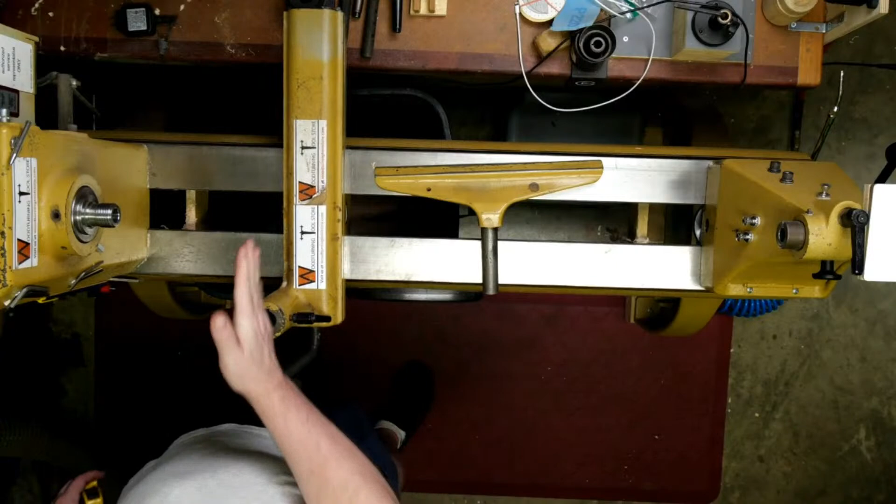So if we measure that, that is about 8 inches, so you lose a couple inches under the banjo. But that's why they put the banjo tool post offset up this side of the banjo. So I like that design where the post is offset from the banjo. And if we look overhead, yeah, that's going to show it - you can see that if I have the tool post here, I'm missing the banjo. So that is a nice design on this kind of banjo.

So what I don't like is just the single pinch point on the banjo. It's not a clamp, so to speak. And I guess I could zoom in a little bit on that.

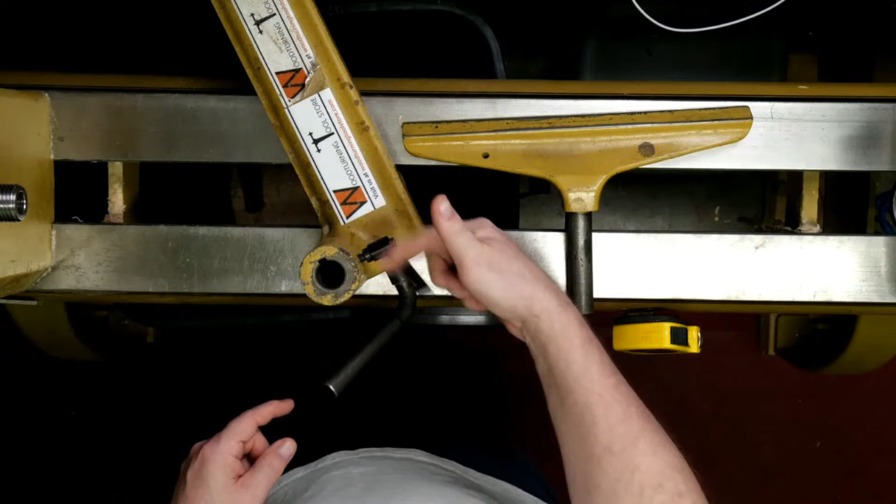Other things to note about the banjo that I do like is that I can move this from this hole to this hole to a hole over here, so I can move that any way I want. The other thing is that, and most banjos operate this way, you can lock it this way or this way. It's a simple cam shaft underneath there, so either way will work.

The other unique thing about this banjo is it's got slots in here, T-slots. Yeah, that kind of shows a little bit right there. So that's a T-slot running down the whole side. It's also on the other side, but it stops here because this part's in the way. So I've got T-slots along this whole length here. And what is that for?

Well, I bought an accessory that everybody asks me about every time they see it in a demo. I'm going to put my tool rest out of the way, and I'll bring it out over here.

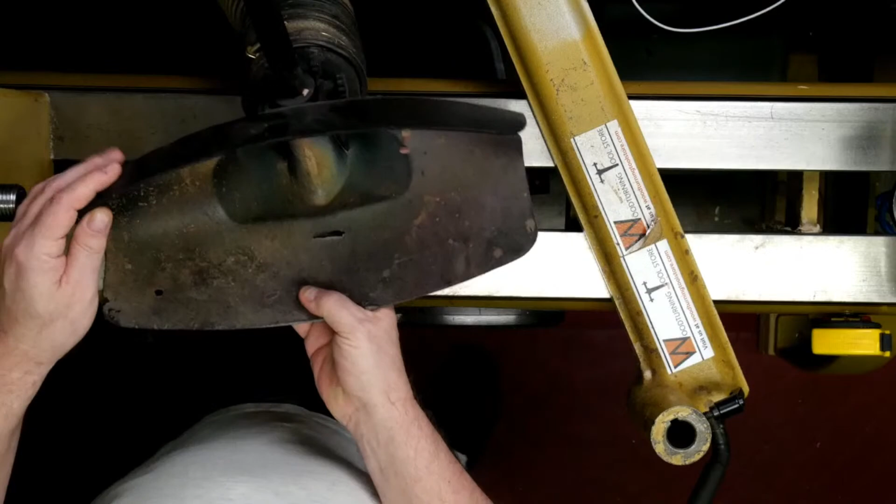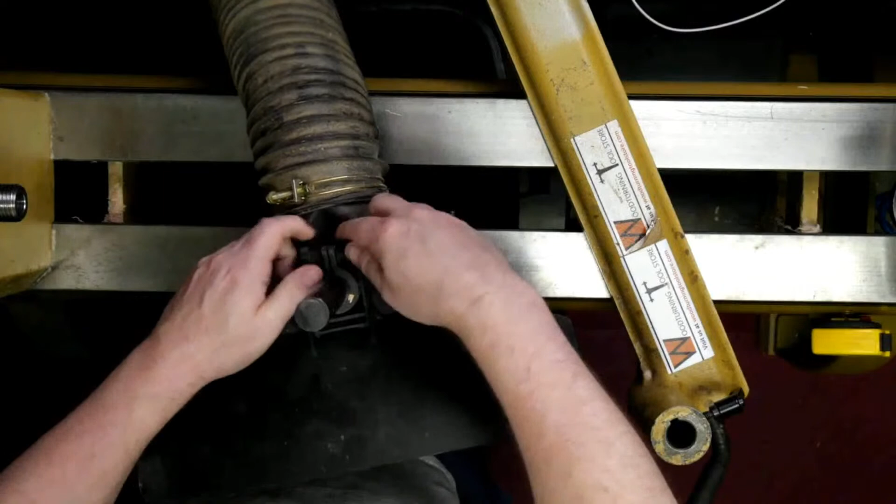It's this dust hood. So this dust hood is a flap up here that kind of goes out. There's the hole, so it goes in around this center post and into a 4-inch dust hose back here. This center post is what goes right through the middle, so I can loosen these two knobs - actually not that one, these two back here - and raise this up to the top of the post, down to the bottom. That might be better shown over here, up to the top and bottom.

Move that around, kind of see. So that allows you to get the height on this where it sits, and these other two knobs make this flop or not, and so I can tighten that up and have that stand. If I get that tight, up out of the way, or down, or stay anywhere I want.

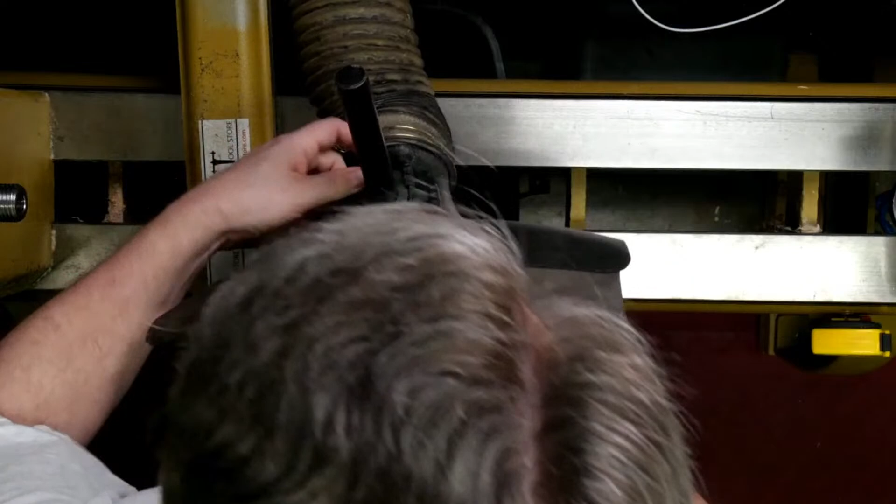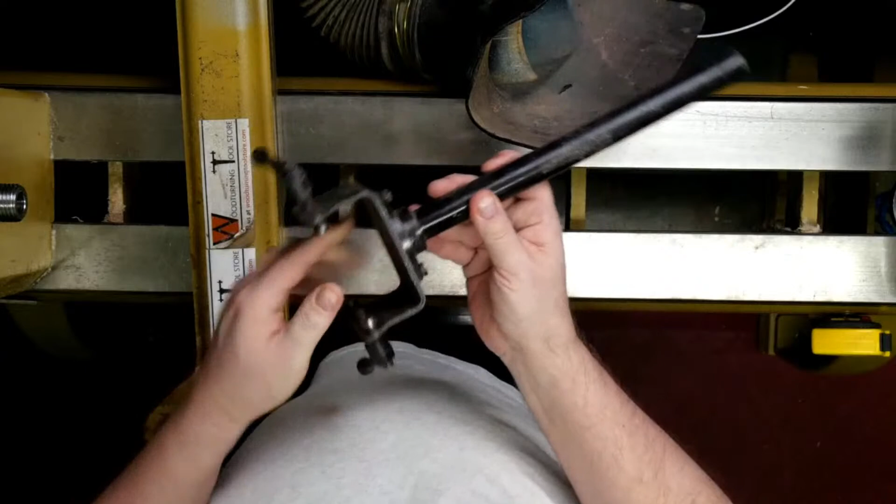So on the base of this guy, and I'll switch back over here, is a flat bracket. It's basically a flange mount, and maybe I'll take this right off. So we've got a flanged bracket, this pipe onto an L bracket, and we've got some T-slots here and some more spring clamp twist clamps here.

So what does that do? That slides right onto that T-track there, and so I can position this post anywhere I want along there, and I can tighten it up, loosen it off. So that is what that is for.

So from a side view, you've got this post you can move around in your banjo. And so when I stick this back on, tighten that back up. When I am turning, I've got my turning object and my dust collection right there, and it's going to stick with me wherever I put the banjo.

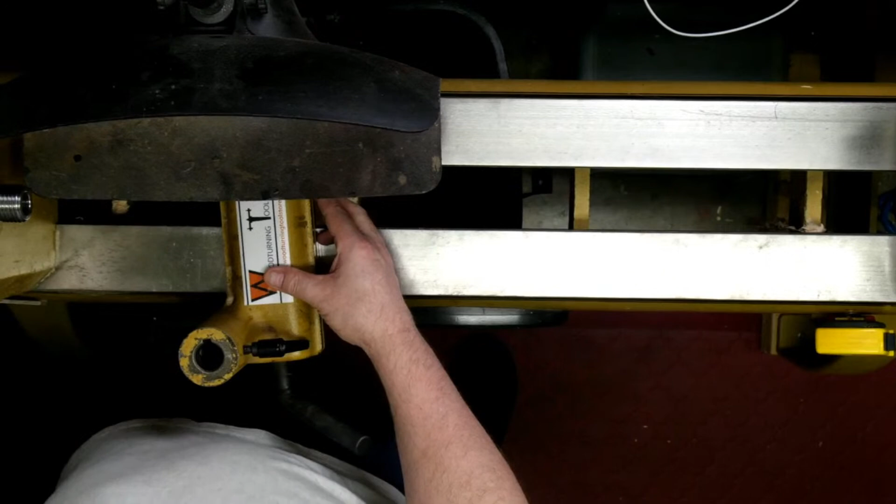So there are some times when it gets in the way, especially right here at the headstock. Move down this way a little bit - it's going to get bumped up against there. But you can easily turn this, move this, and twist your banjo and twist this head, whichever way you want to go. So it is one of the most asked about accessories on this lathe that I've encountered.

I got that thing when I bought the lathe. I bought this lathe in 2007, so that's 16 years ago. I don't know, you can't find these anymore. They hadn't been sold - I think a couple of years after that they stopped selling them. Great accessory, but I think the machining in the banjo was just them trying to cut costs or something.

But yeah, something like that would work if you have the wherewithal. Even a heavy magnet on this guy with a dust hood, or just a hose, would be fine as well. So let's see, yeah, 16 years ago - all the other accessories that I've got with this lathe.

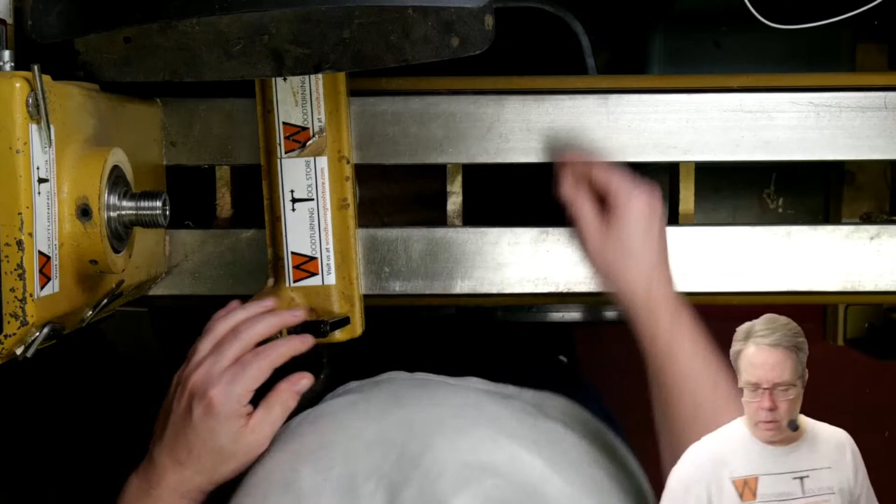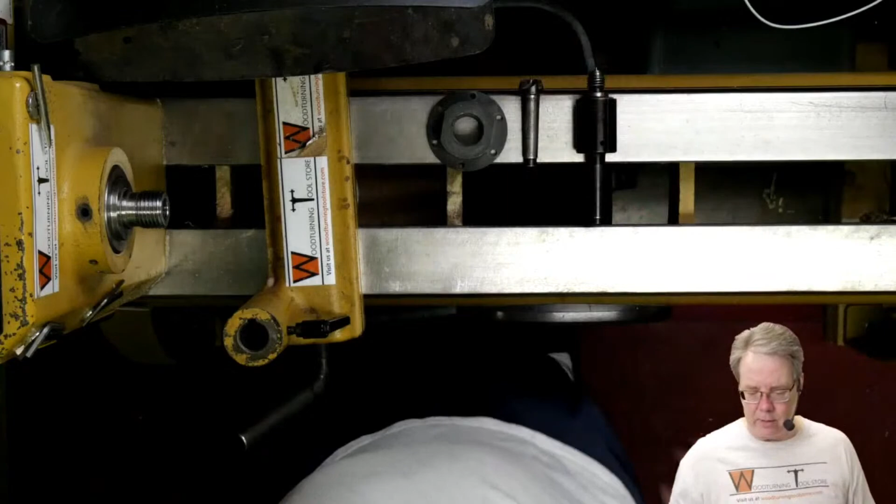Let's see, there is a faceplate, live center, dead center or drive center, and then the replicating pin and drive. And those things go in these brackets. These brackets go on - I don't know what's the best way for me to show.

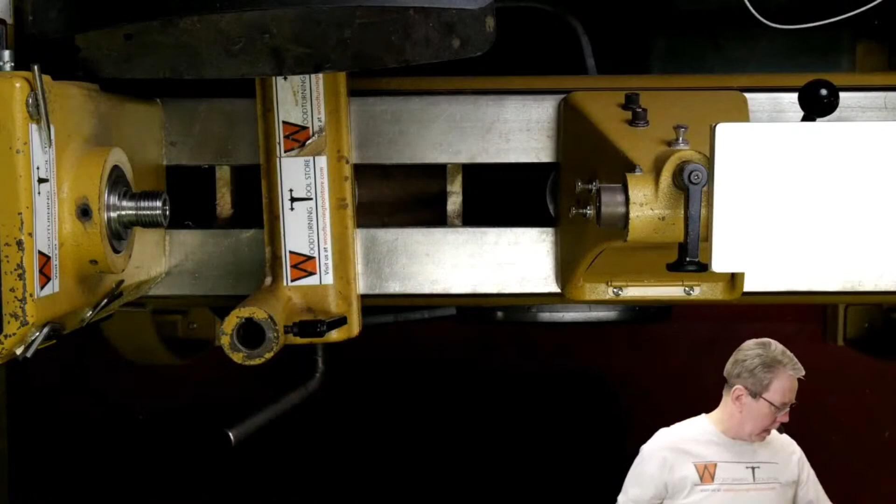So I've never used this guy, but you can see these two bolts here, and there's two more over here. I've got another one of these that has the right bolt pattern for this side. This one's for this side near the headstock, and then another one here. Basically, these two guys would go into these holes - I'll just show this one here.

This one is the headstock one. It's got these indents in it, and this has a plunger pin with a pin in there. So if I pull that pin, drop that in, it'll lock into that and won't turn.

So that's the drive side. That goes on this side, back of the headstock here, and then the other side will go on here. It's for replicating spindles. So you hold your spindle pattern up there, you turn what you're turning, and you can replicate it. Use your drop notches if you want to use those and that kind of stuff.

So I never used this, so I took these brackets off pretty quickly, but I kept them around. So anybody out there use those? Let me know, because that's what they're for.

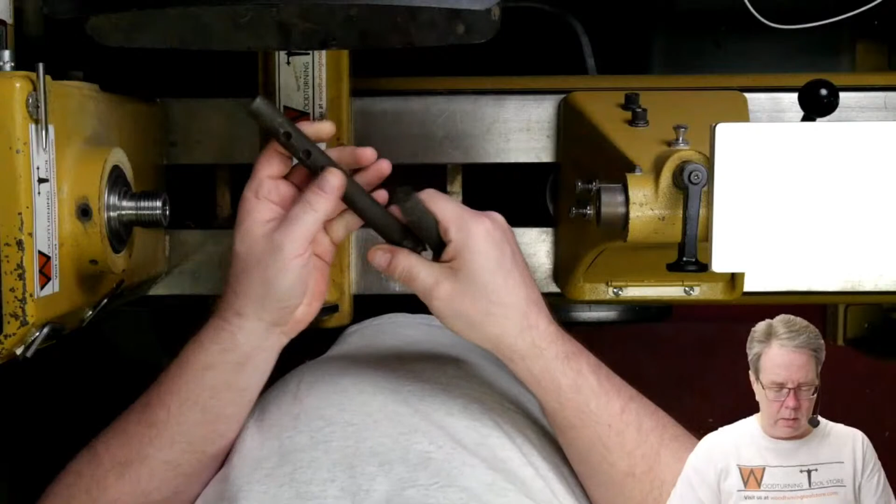These are not, by the way, Morse tapered. These are just straight shafted. These ones have a thing in it, and this is a flat for it, the other one has a clamp on it, so you can clamp it down.

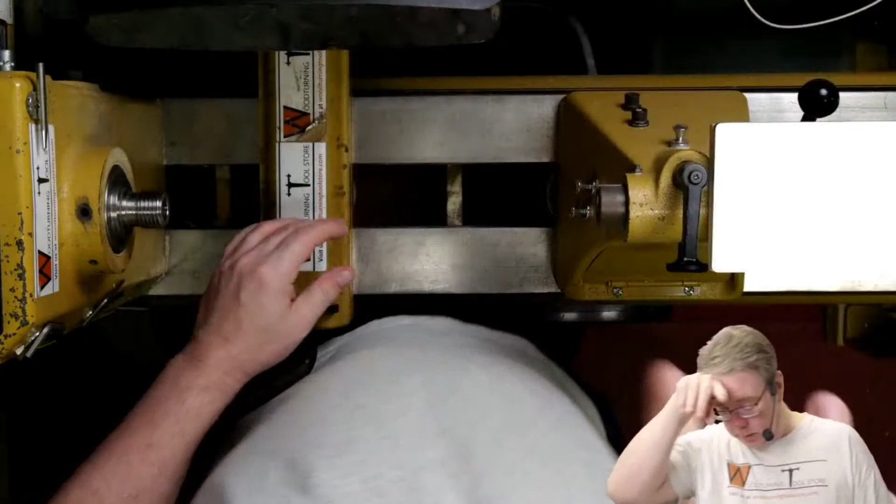So that's the accessories: the drive center, live center, faceplate, the brackets, and the spindle pattern holders. Oh, and there's a big cage that you can put on this. It's in the shed. I haven't even unwrapped it from when I bought it 16 years ago.

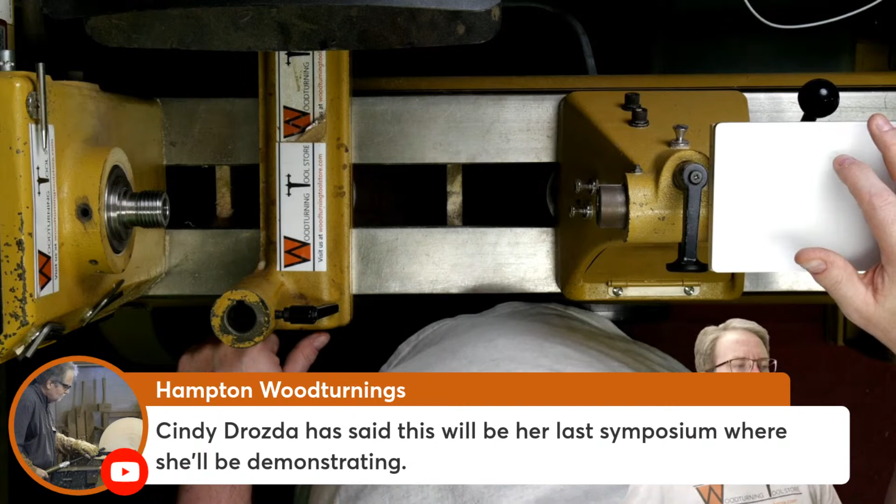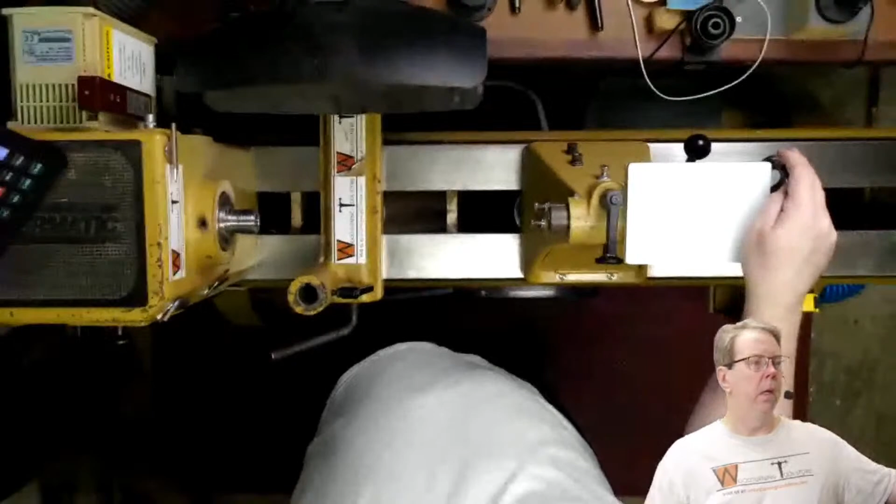Scott says Cindy Drozda has said this will be her last symposium where she'll be demonstrating. Yeah, she did say that. I think in passing, I don't know whether that's true or not, but yeah, it's a lot of work being a demonstrator. Just get my belly out of the shot. Sort of taking all your tools and going down, doing that work, and plus she has a booth, so it's a tough thing for her to kind of demonstrate and do booth work at the same time.

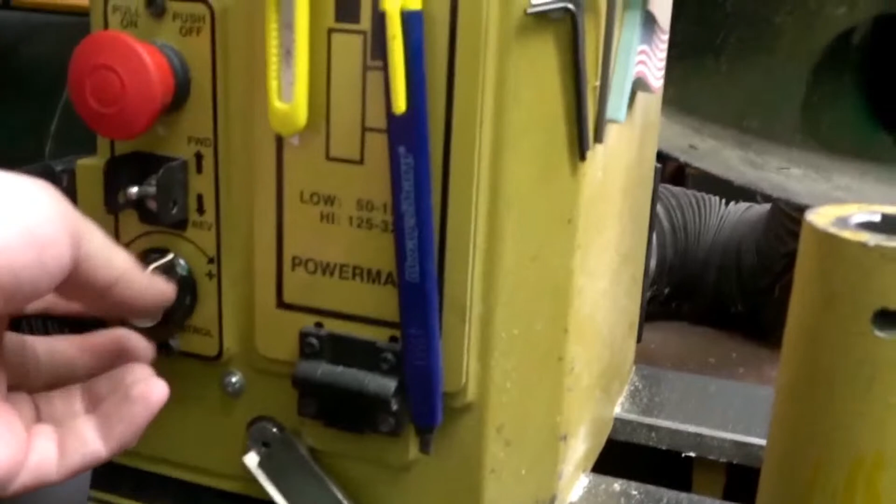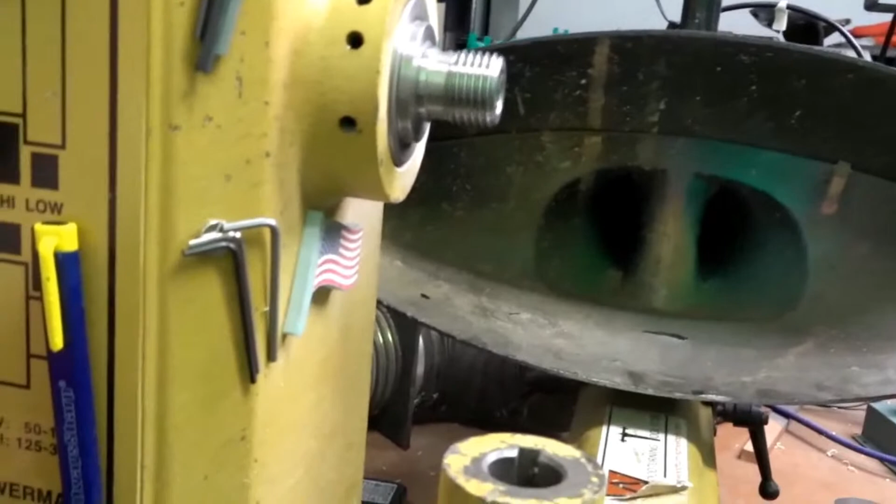So there's the variable speed switch here and push-pull button here. And that gets the spindle going, and that gets up to 3,200 RPM.

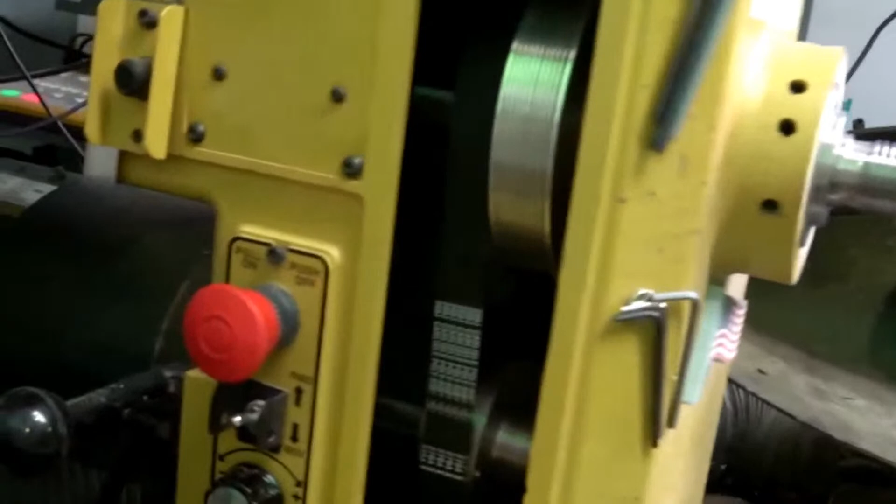I've got all my little magnets on my pencil, my utility knife. This is the pulley drawer. So if we look at the pulley, it says low 50 to 1200 on this side. High is on this side, and that's 125 to 3200. So I'm on the high side right now. So this is how you change it.

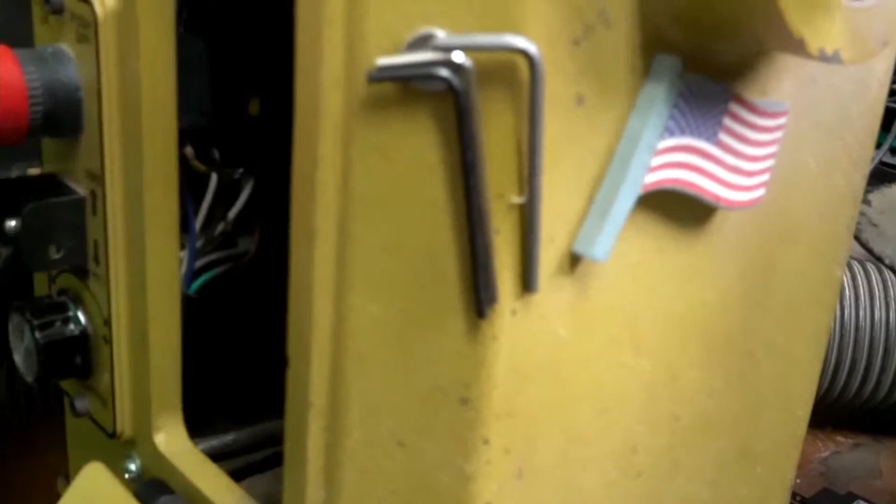And John's had to go in and change this switch off in there, and I wonder. I do have a light. Sorry, folks, here's the rest of the shop as I swing my hand around. There's the green screen. Back to the lathe.

Trying to operate the camera at the same time, not very easy. All right, so got myself a little light here. So there's the light switch, or the power switch back in there. So John had to replace that guy a couple times. I have not, and so I don't know.

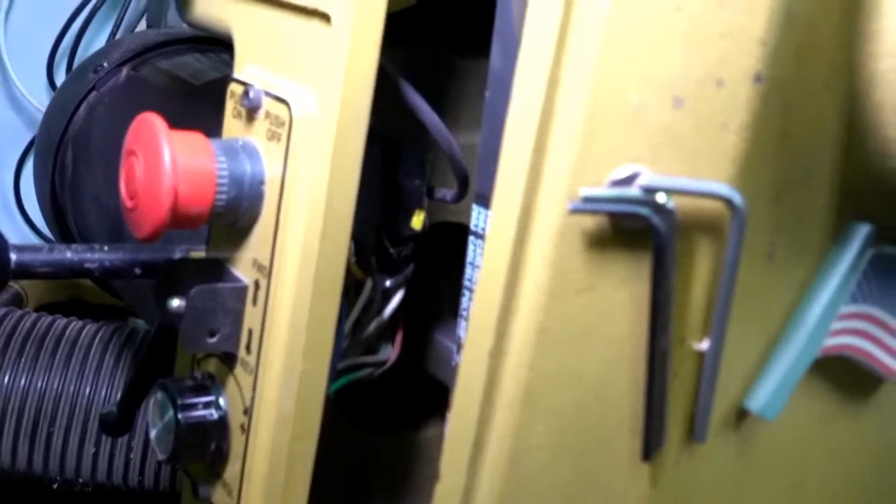I pulled it off once, pulled all the guts out, because what I did have is up in there on that shaft. I can get up in there. There's the main shaft. Back behind this RPM meter is a place where this lock knob is. So if I turn the spindle there, it's locked in. So that's the spindle lock. That locks into a block that's running in the shaft that has a slot in it.

That came loose, so my spindle lock wasn't locking. So I had to pull all this out, pull that out, access that little pulley block, and tighten up the set screw on it to get it to lock again.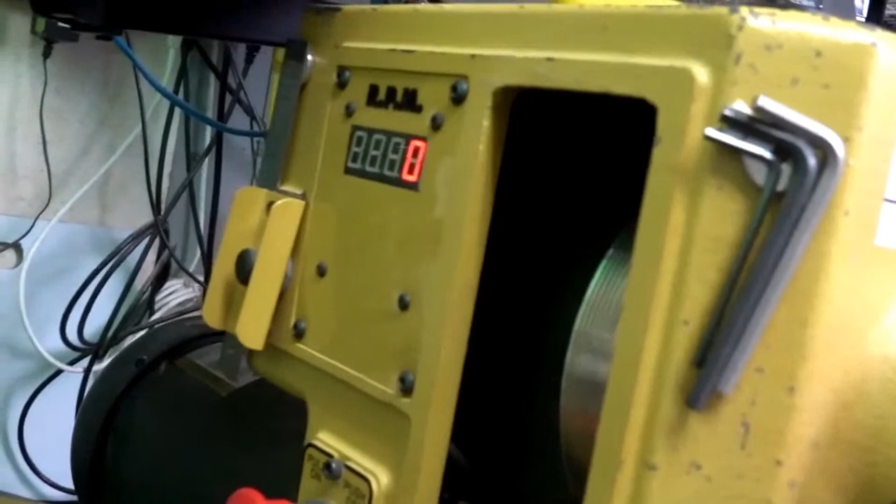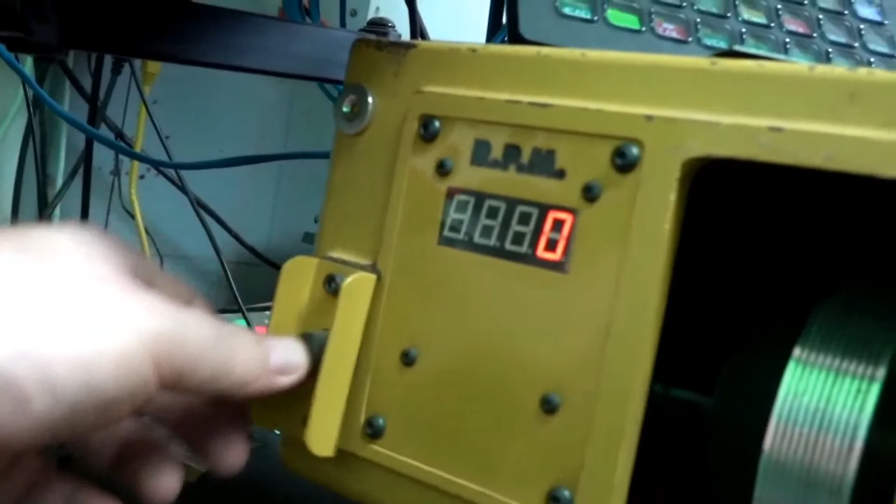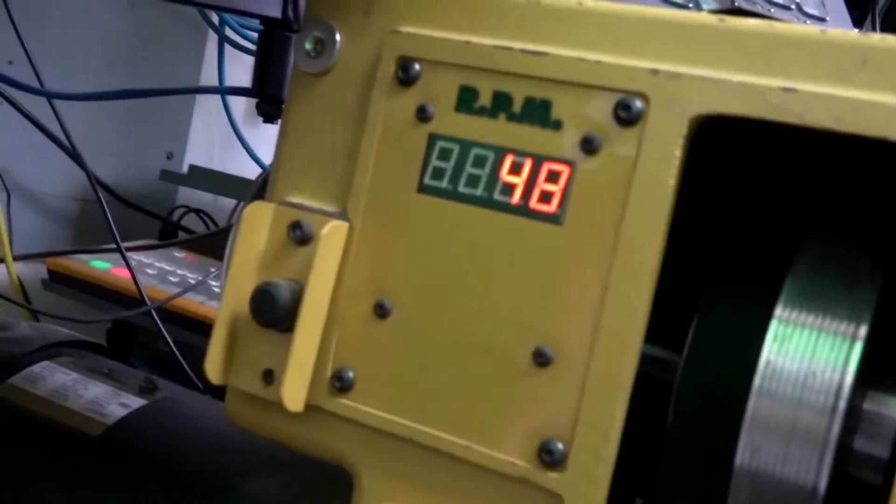One of the cheats I've done, and this is just a ruler hanging on a magnet, is in order to keep that spindle lock down, I took out the bottom screw. I'm not quite sure where it is now, so whoever buys it is going to have one loose screw. I loosened this top one, and when you push it down, you just swing that bracket over, and that locks it for you. Then you just push that back, and it's unlocked. So that was a nice cheat somebody told me about years ago. So there's the lock, swing that over, and unlocked.

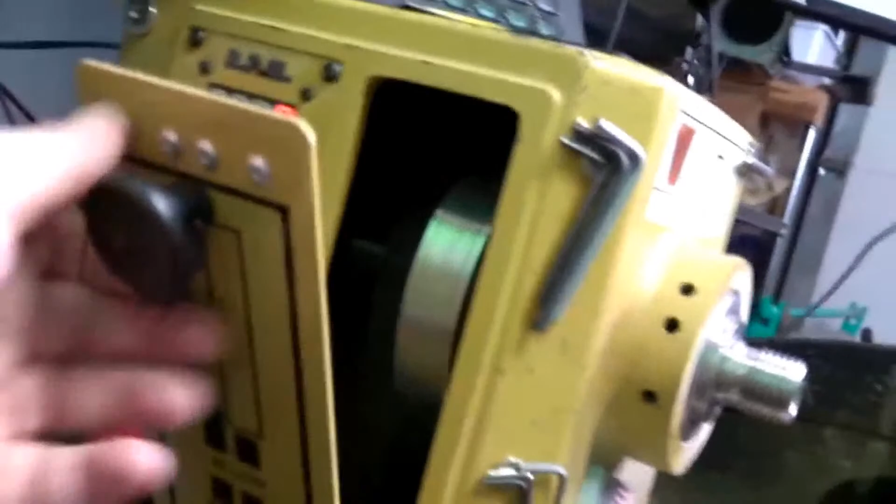If I just barely turn it on, I get 162. I don't know how I get 125. There we go, 129. That's about as low as I can go.

Yeah, that's as low as it goes on the high pulley. The low pulley will go down to 50. I'm on the high speed 99% of the time, so I don't change the pulley very often.

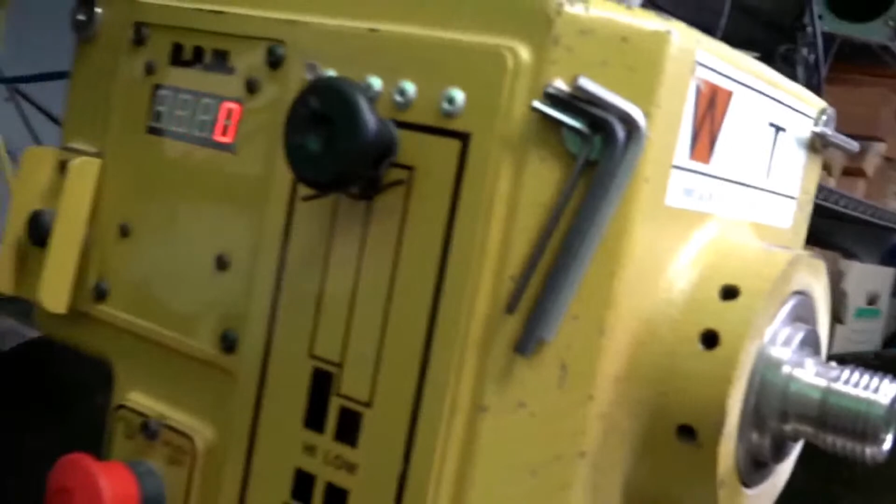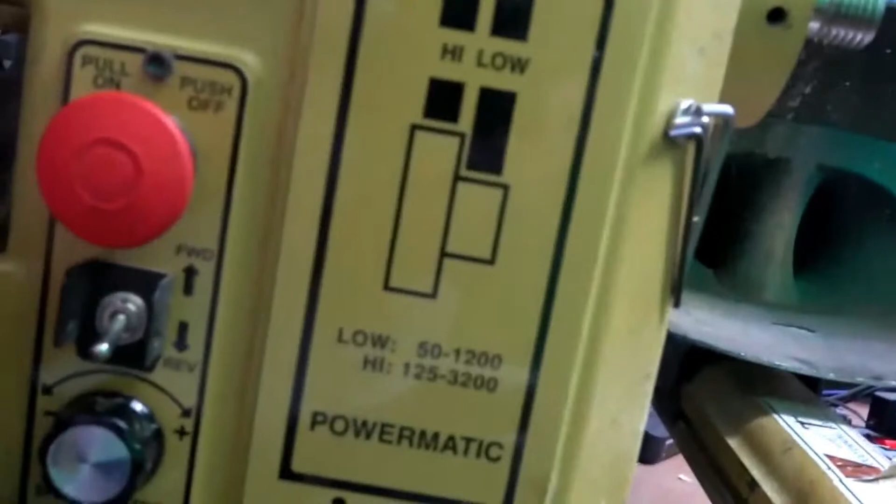Here's the forward and reverse switch. The motor is sticking out the back, and we've got a clamp lock here. Loosen that and it will raise your motor up and down, and that's how you tighten or loosen the pulleys.

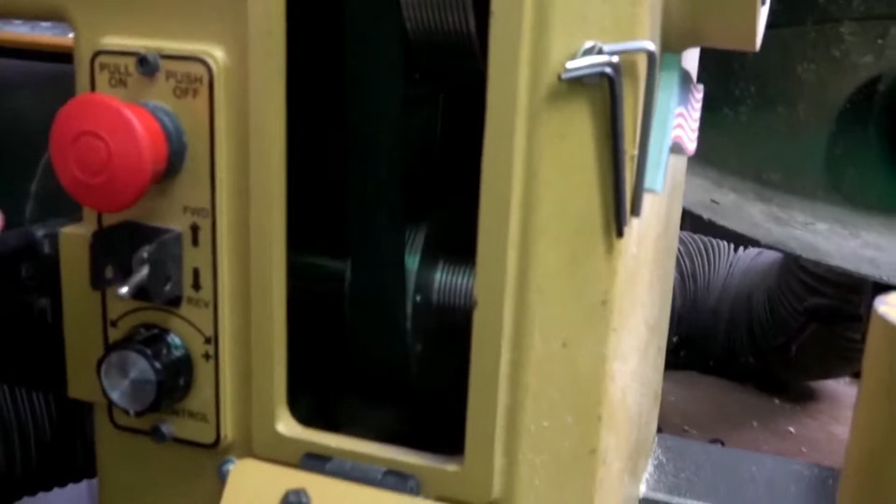You can see the slack there, it's hard to see since it's not very light in there. Let me try a single-handed maneuver here. So if I lift up this bracket, that loosens the pulley, and then you lock it off.

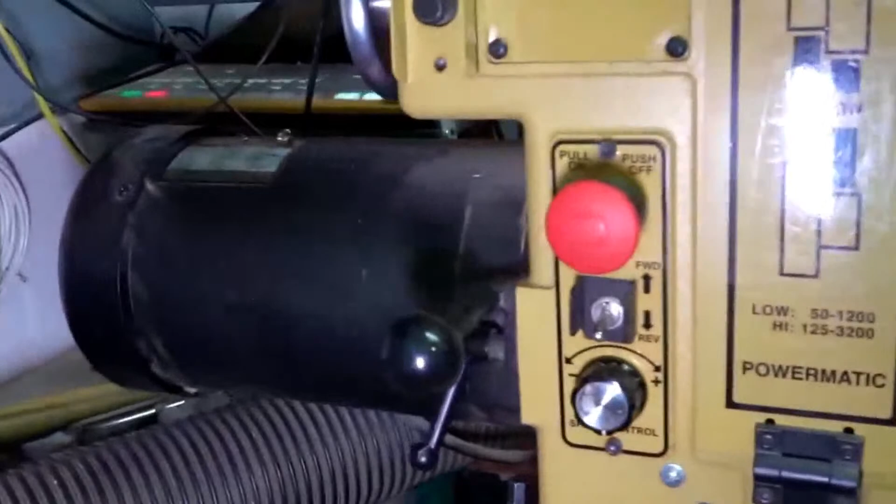The hand wheel is back here, underneath my keyboard tray, so it's a little hard to get at for me right now. That's the motor, obviously. Down here is the accessory tray.

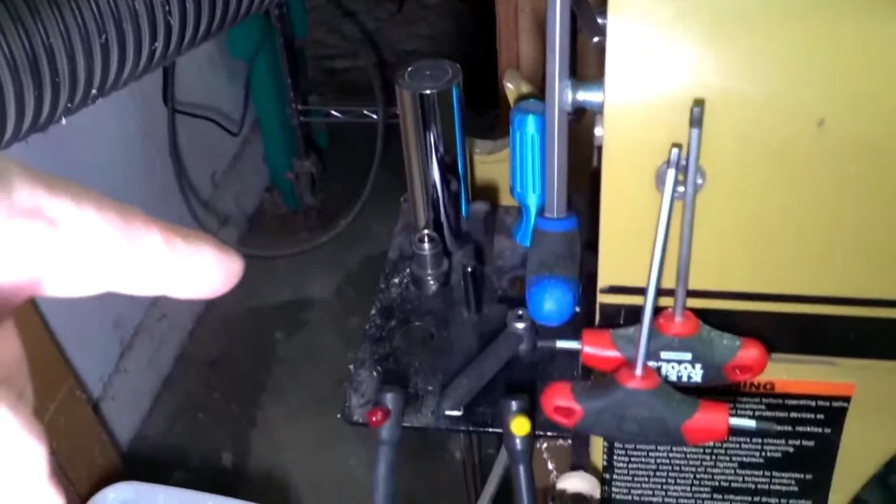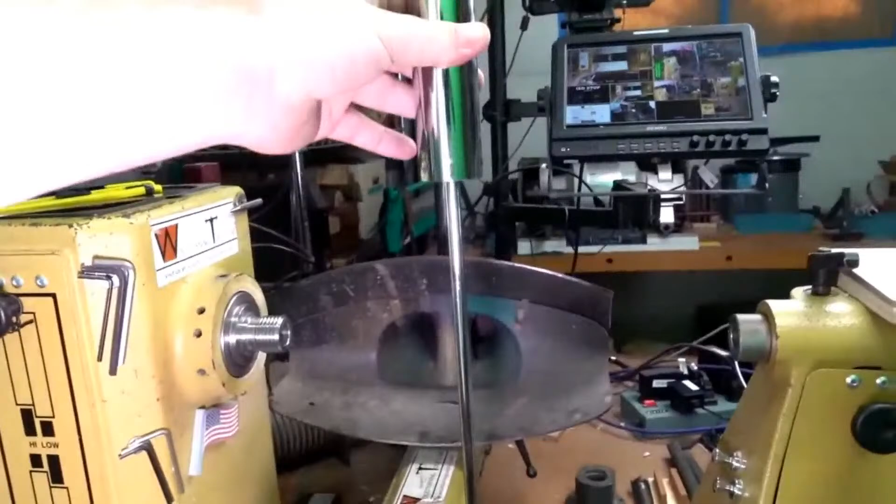It's bolted onto the side, so I've got magnets here holding Allen keys. The knockout bar is another accessory - in fact, I might keep this one. I wonder if I can zoom out a little bit. This knockout bar has a plunger action that gives you some momentum when knocking things out. And then you've got the big Powermatic wrench back there, the yellow wrench.

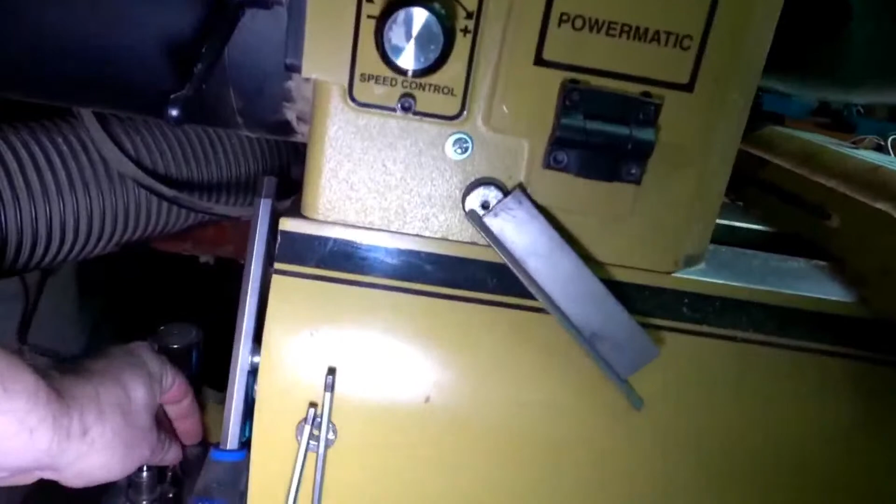The other accessories that come with it are these little guys - this is your indexing lock. Don't buy a Powermatic for indexing, it's horrible. You've got 1, 2, 3, 4 holes.

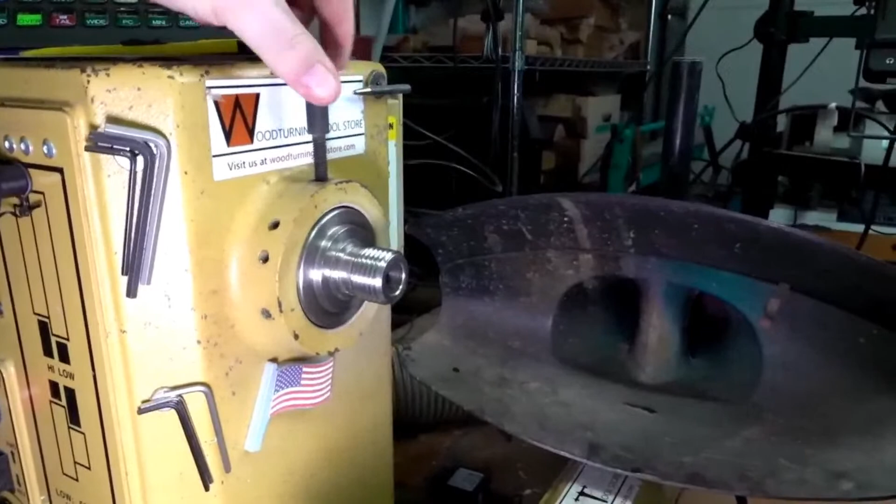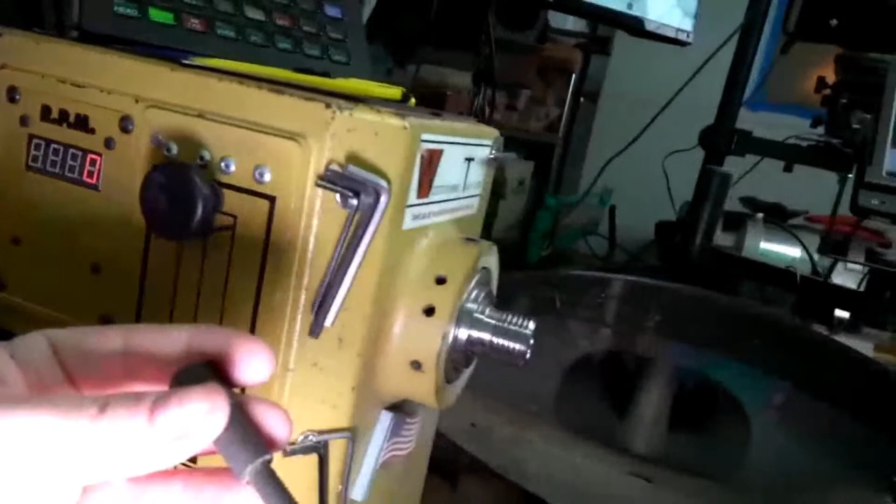On a B model, the way they want you to index is screw that into there until you get down to the depth, lock it off, and then it locks off. I'm not going to go all the way - this one I think will give you 12 holes, and you can do 6 as well. I can't remember, but in the manual you have to check which hole, A, B, C, or D, for 14, 16, 32, 48, 60, etc. It's just ridiculous, but I still keep it.

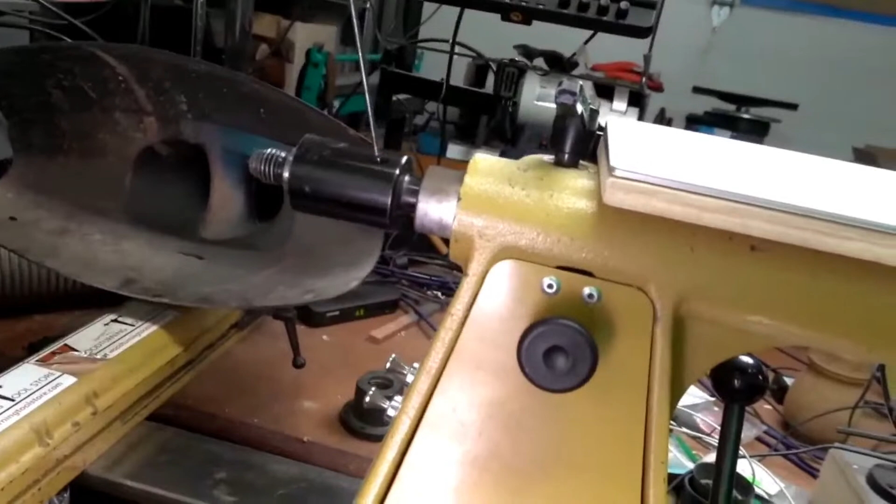3/8 by 16 is the thread on that. The other one is a little locking wire, and that's for the steady rest - turn that away. It's got a little hollow in there, so when you get it you can put it all the way through, and that locks this so you can add on accessories, which I keep in here. Here's the cone point that comes with it, so now you can screw that on. So that's what that's for, to lock your live center.

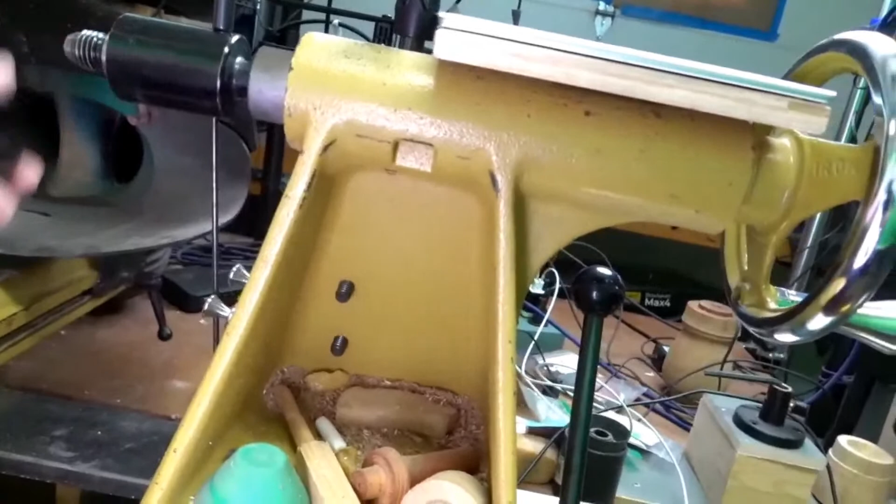This door in the tailstock is kind of nice - I keep centers and stuff like that for the tool rest, plus chalk and wax and stuff. So that's that accessory, and it's got a little hole right down there.

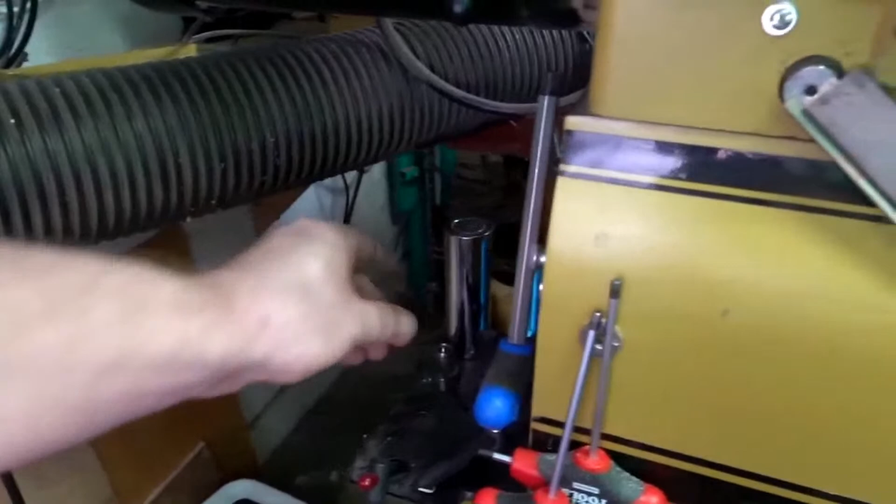What else? The feet are there, obviously - I've got them on two 2x4s, raised up off the floor. My spindle height right here is about 48 inches. My new lathe, which is going to be an American Beauty, can get up to 49 inches, so I'll raise it up all the way to 49 and have this just slightly higher - that's the way I like it. I'm 6'2", so it's hard when you're bending over so much.

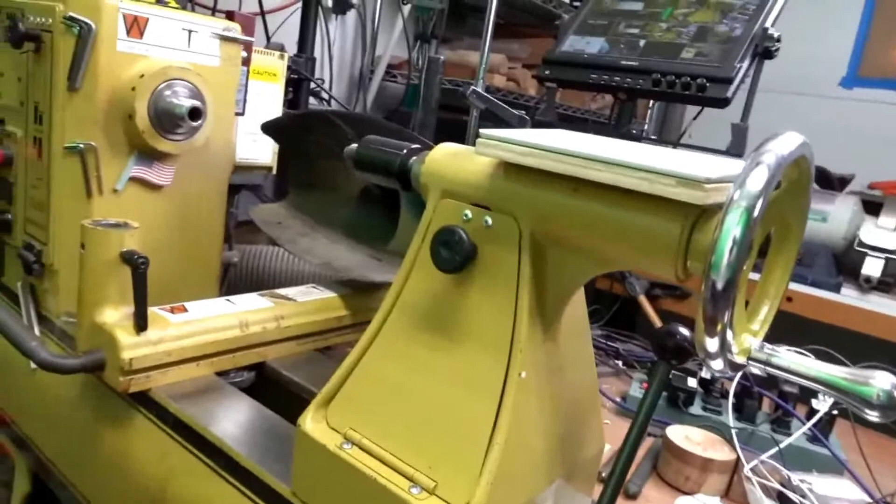All right. And zoom in just a little bit on that one. Yeah, it's pretty good. All right. I didn't do this earlier - I should have done that.

So we'll catch up on questions. John, I guess I don't know the answer to your question - I have not changed this switch out at all, not sure what's going on. Charlie said, 'Now that's a good idea,' and I'm not sure what that is, but thank you. I'm going to add a remote switch because my push-pull switch keeps wearing out - I use it a lot, and Powermatic's still covering it under warranty. Okay, good, I'm glad they're still covering it.

When the lathe is slowed down, does it hurt the electronics to reverse the speed before it stops? No. In my experience - 16 years with this lathe - I can pull it on, have it running, throw it into reverse, and just come back the other way, throw it into forward.

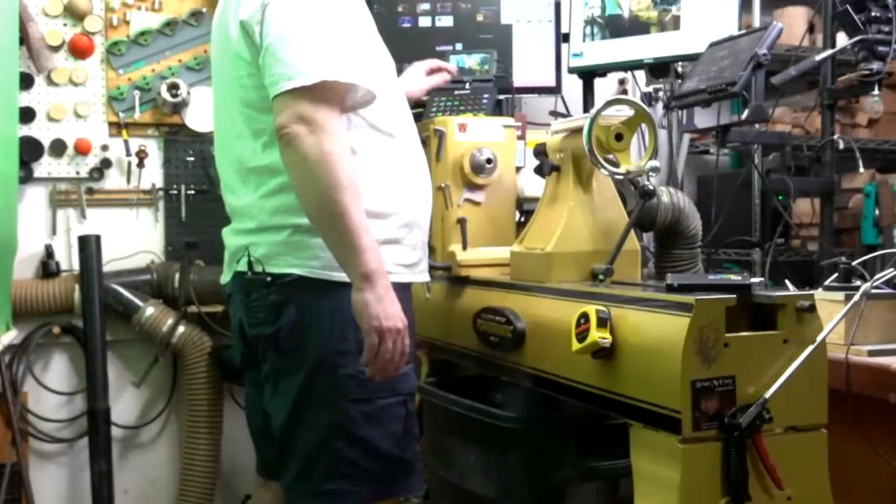So let me go back to this shot, and I'm going to just take some quick measurements. The lathe bed is 50.25 inches.

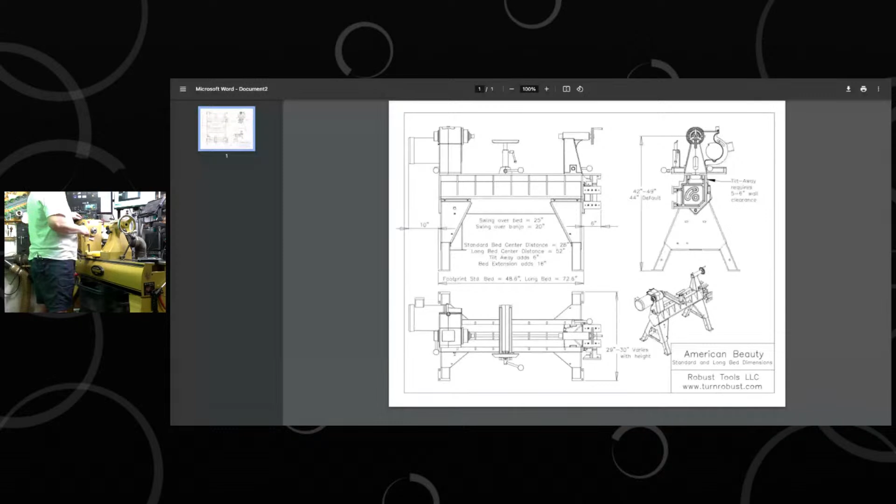So this is the spec sheet of the American Beauty, and I think I'm going to have to pull that spec sheet over to another screen so I can see it at the same time. So its footprint of the standard bed is 48.6, about the same as this lathe here.

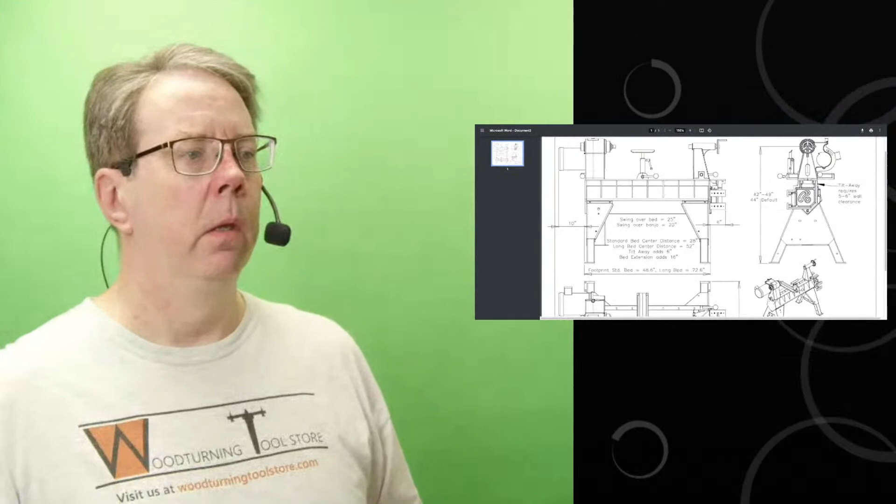So let's do this one here, and let me pump this up a little bit so you guys can see that. And so let's see, now let's go to that one. Yeah, so this bed length is 50, so it's about a little bit shorter.

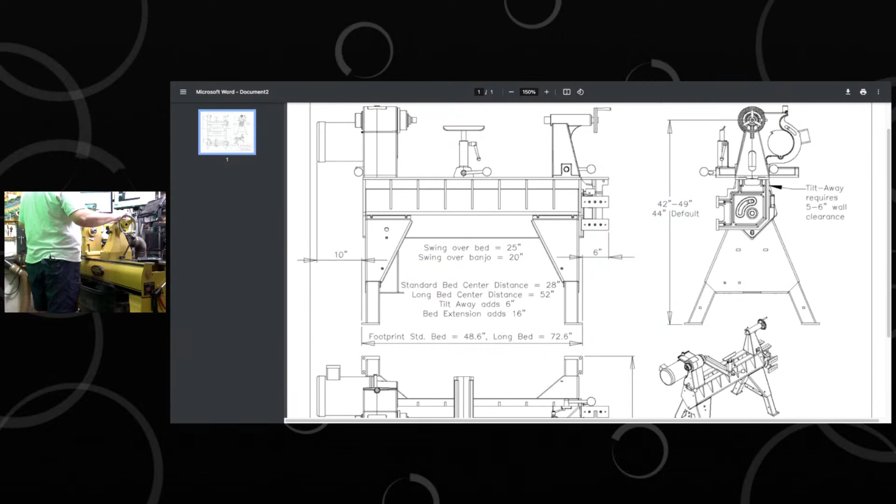But what I'm also getting is that tailstock swing away, which adds on. As you can see, oops, I don't know if you can see that, not showing my mouse - it adds 6 inches. So I'll be actually a little bit longer than I am today. 48.6 plus 6 is 54, so we'll be 4 inches longer than I am now. That's all right.

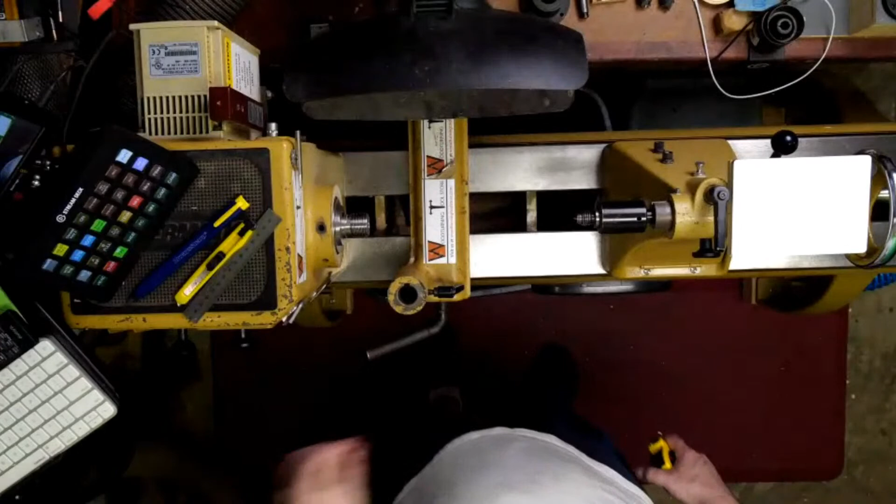The big thing I'm going to have a problem with, I think, is my footprint. So if I go overhead and zoom all the way out, it's the distance between my table back there - that's a big table - and the footprint of the legs. Right now these are about 2 feet long, 24 inches, right there where my thumb is, for my feet, which if I do that over here you can kind of see is about there.

The American Beauty spread of the feet is quite a bit wider, it's 30 inches. So 6 inches doesn't sound like a lot, but if I leave that table back there where it's at, that means my lathe has to come this way 3 inches, which eats into the width of the bedway. So instead of there, it's going to be here and forward. That's going to be something to have to live with.

I'm not quite sure. So overall, don't get me wrong, I'm excited about getting this American Beauty. But I got to say, after 16 years with this lathe, I'm apprehensive, a little nervous, because I'm so used to this lathe, its footprint, and how to use it. Changing tools is like picking up a brand new gouge you've never used before - it's going to take you a little while to get used to it.

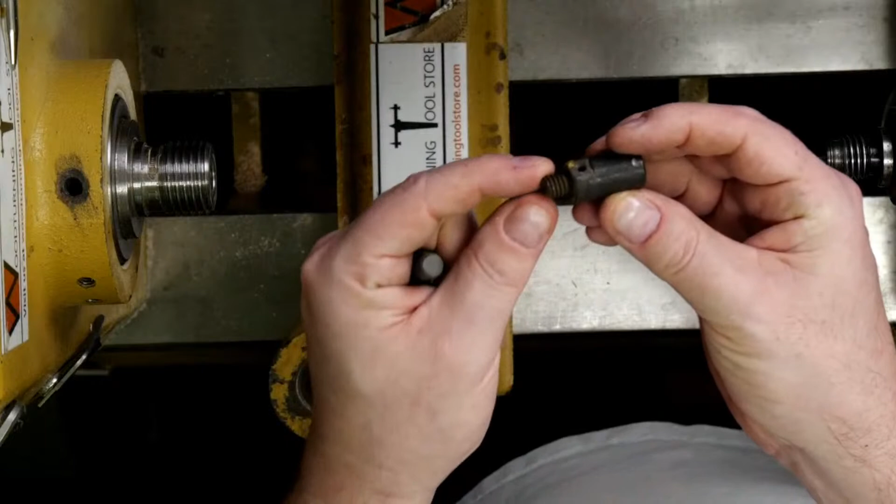So 3 holes to mount the bed extension. This other hole here is for storing this guy - I'll show that here, zoom in. This is just a little 3/8 by 16 stud with a big top on it, and it goes in the... I wonder if I can reach there. I'm not quite sure I'm going to be able to reach.

Oops, I come out. Just barely. So here's my light, let me get that out of the way.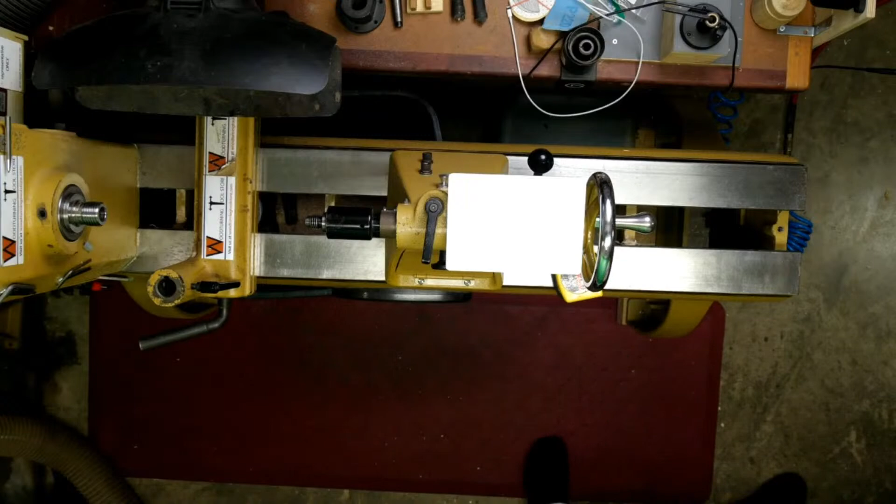If we look down the bedway here, there's a hole in the top, not in the end, but in the top. If I put that in the top, that prevents my tailstock from sliding out. It gets stuck, it stops there, and it won't fall off. So that's what that little lock is for. Many lathes have those. Well, what I like about this one, everything's 3/8 by 16.

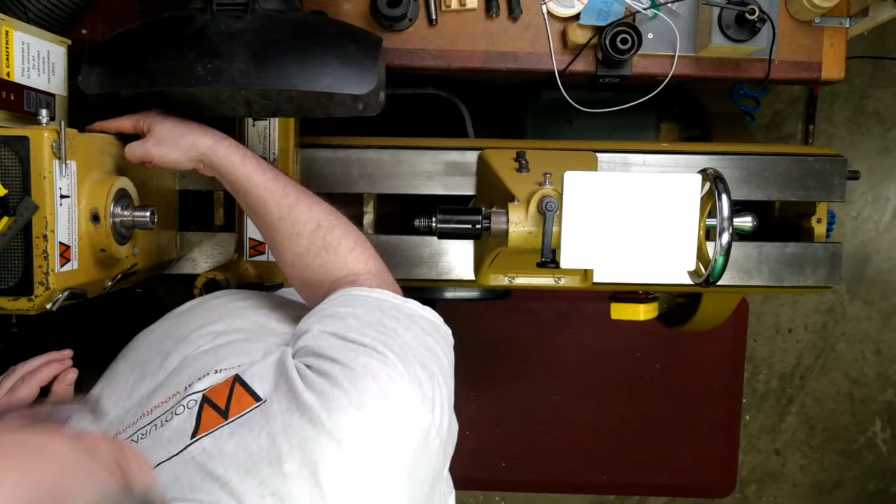They've got a little hole on the end here to store it. So this bolt I put in this headstock bracket. Here's bolt 1 down here, you can't really see it, but it's under there. And bolt 2 for that replicator bracket.

I put one of these lights in - you can clamp a light on there. It's one of those sockets for one of those light mounts. This is really where this guy goes.

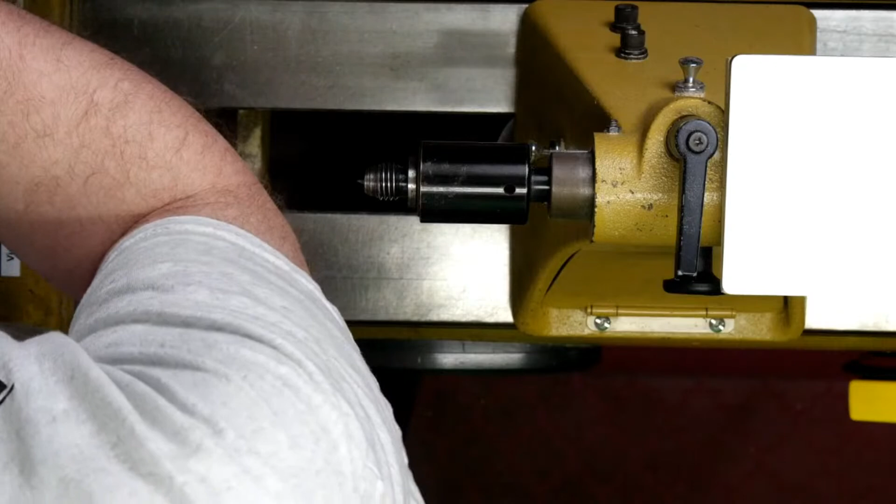Oops, wrong thing, Todd. Wrong way. There it is. So that bolt goes in that hole to hold that thing.

This is all cast iron. So I'm going to put this back in the temporary holding location. Actually, it goes in the bottom one - I use it for hanging my hose on. I'll put my light stud back in there. Haven't used that light for a long time. And there you go.

David has a comment: previous to my purchasing my current American Beauty, I owned 4 other lathes. The American Beauty is the best lathe I have ever turned on. I think you'll be happy after adjusting to it.

Yeah, I don't doubt it one bit. So I think you're right. I think it's just a matter of getting over myself and knowing that I'm going to have an American Beauty. It's just things, you kind of get used to things.

I've got everything for this old lathe that is going to get sold. So if there's anybody in the area looking for a used, well-loved 3520B, reach out. I haven't looked at used pricing yet, so I'm not quite sure. Your thoughts there would help if you have ideas what you think it might be worth. Let me know in the comments, or shoot me an email afterwards, either way, and we can take those opinions on board and help me along this way of getting this new lathe.

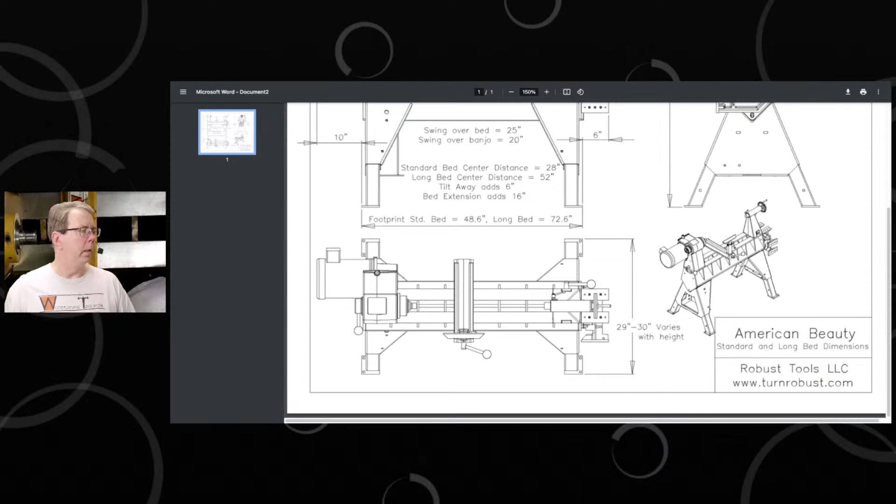So let me finish - I think I finished showing everything I wanted to. Yeah, so there's the footprint, 30 inches. Let me scroll - there we go. Height, tilt-away requires 5 or 6 inches of wall clearance. That's fine for me. So that's where I'm at with that. It should be good.

Blake says, I added a switch below the tailstock area so I can get at it quick and easy when hollowing.

Yeah, the other thing I'm going to miss about this is this being cast iron. So there are a few things, like a magnetic bed - the stainless steel ways of the American Beauty are not magnetic, but the whole truss system and bedway support system is all magnetic. So their controller is magnetic, and you can move it from the headstock down here.

So that I'm really looking forward to, because when I'm out here, let's go tailstock view. When I'm back here turning on this end, reaching over, and I got something - maybe 7 would be better - when I got something swinging out here and I'm back here, having to reach around to push that off is just a bit of a pain. So it would have been nice to build a remote onto this. I just never got around to it and have it magnetized over here somewhere. I'm looking forward to that, but I'm going to miss it.

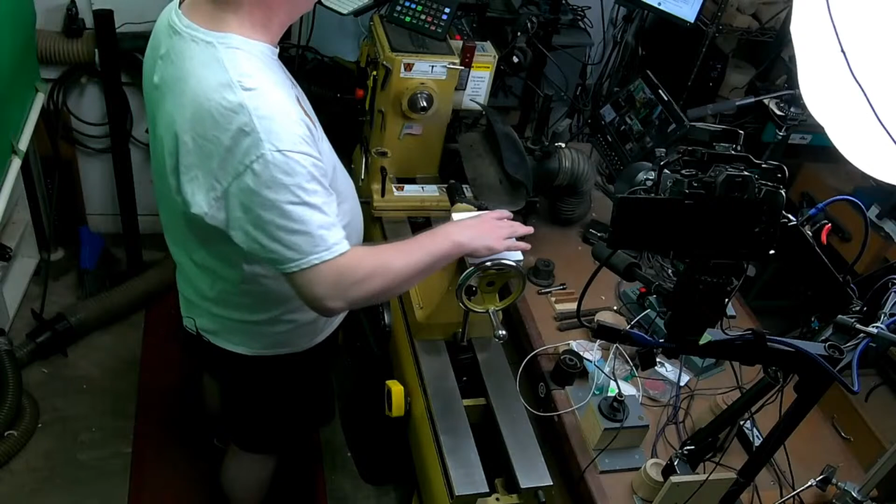I'm not going to miss cleaning these. Not that there isn't maintenance on everything, but I will miss the magnetization. I do use a ton of magnets, as you can tell, all over the place - these are all magnets, my magnet there. Even this, my trackpad for my mouse, sits on a fairly strong rare earth magnet that's just sitting on a round top here, but it slams down pretty good. And I got magnets on top that hit the right magnets on this Apple trackpad, so that just sits up there. So magnets everywhere - magnets over here holding hex keys, holding hones and stuff. Lots of magnets.

What else? I guess that's about it. I got dust collection coming along here into that hood. The table behind me holds all the tech and stuff, since I do remote demos and stuff.

Yeah. Oh, somebody. Oh, is it on there?

I am seeing. Okay, so this is another thing I'll have to get used to, the locking lever here for the Powermatic. I think for the robust, it's back here, and I'm not sure what the advantage is of having it back there versus here. Not quite sure. And I will say that this locking knob, we go to overhead.

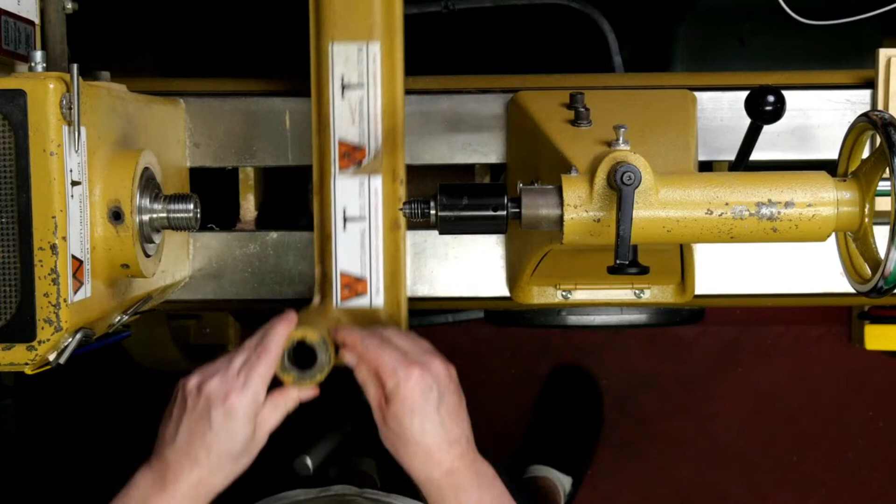But having this banjo tool rest post centered on the banjo, he also talked about some design element with his banjo where when you're way out like this, there's a lot of flex, or could be flex, and I forget what he said, how his design of a banjo mitigates that. So I can't remember.

That you can do this both ways is nice. I think the clamp lever for the tool post can go either side, but it's an actual clamp, not just a set screw, if you will, or a grub screw.

The locking spindle lock is better on the robust. I've got, I think it's indexing, of course. Indexing is going to be a nice thing inside the headstock. I lost my train of thought.

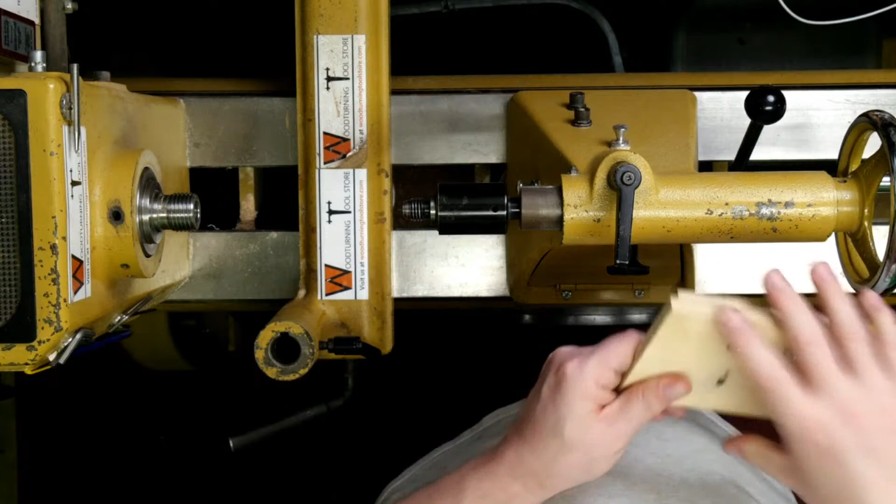That's my trackpad holder again. So that's about a 30-pound pull magnet that holds that guy.

So it's very loud. Let's see, where is that other one? Does that tell me?

I was thinking about the indexing wheel, 48 position. I believe it's in the headstock case, you have to open up the little flap and twist a little dually thing. Not sure.

I was thinking of giving, so here's, whoops, wrong one. Here's a question for you, and I'll look at the questions here in a second. I've got a vacuum chuck, but my vacuum doesn't vacuum the spindle, it vacuums the chuck. So I don't need an adapter on the end of this lathe for a vacuum chuck, but it does limit you in making vacuum chucks.

That's the only thing. So I'm thinking about getting a vacuum adapter and changing my vacuum pump system to use that. That may be something I'll talk with Brent at SWAT. Let's see.

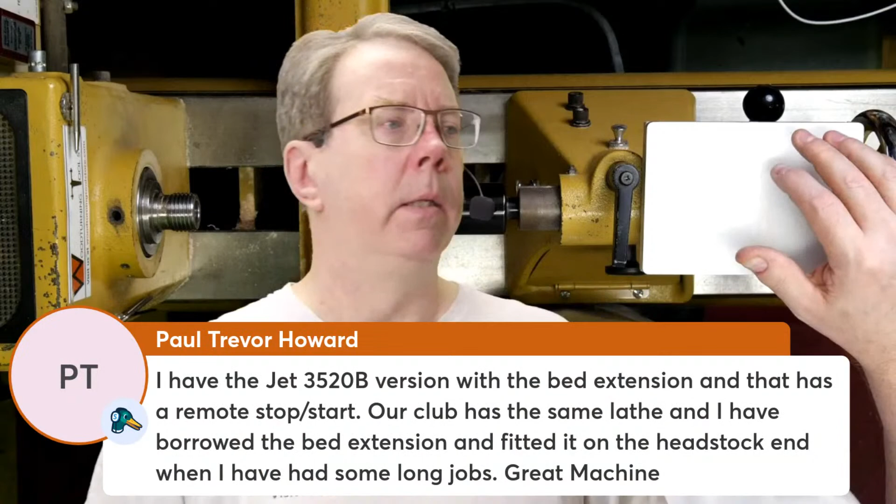Trevor Howard: I have a Jet 3520B version with the bed extension that has a remote start stop. Our club has the same lathe, and I have borrowed the bed extension and fitted it to the headstock end when I have some long jobs.

Oh yeah, so that would be 18 inches on both ends. So yeah, that would be 35. You'd probably get the full 18, so you can probably add another 2 feet on that, I suppose, by putting.

I should have mentioned that those 3 holes on the end here, this hole, this hole, and this hole are repeated on the headstock side. So you can put that 18-inch bed extension on both ends. If you had 2 of them, like Paul does, or can get a hold of, then yeah, you could stretch out to probably 6 feet total. So you could probably do 4, maybe just over 4 feet between centers.

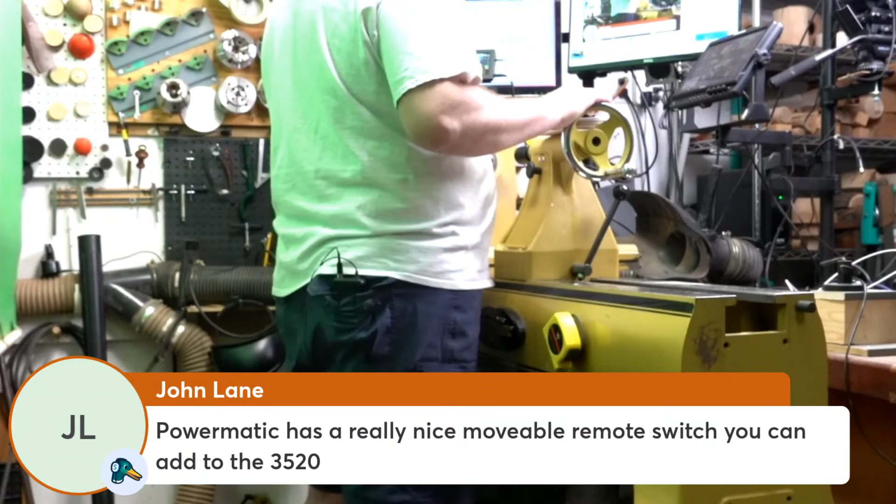Nice, Paul. All right. Powermatic has a really nice movable remote switch you can add to the 3520. Good to know, John.

Yeah, I don't think I'll do that now because the robust will solve that problem. The most expensive way to solve that problem is buying a different lathe. That's where I'm at. So anyway, that's my journey or story with this Powermatic.

And I do really like the flat headstock. I pile stuff up here all the time, and as you can see, I've got my Stream Deck up here. I've got a small monitor mounted here. I wonder if I can do this shot and just raise this camera up a little bit.

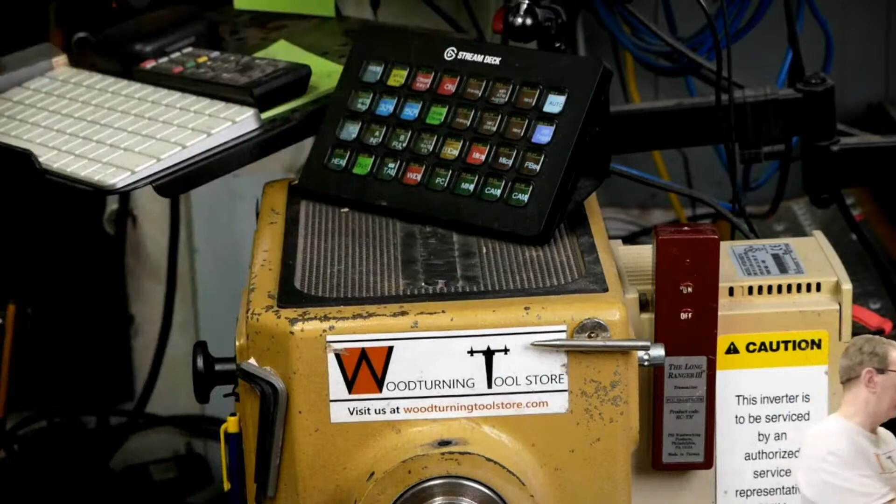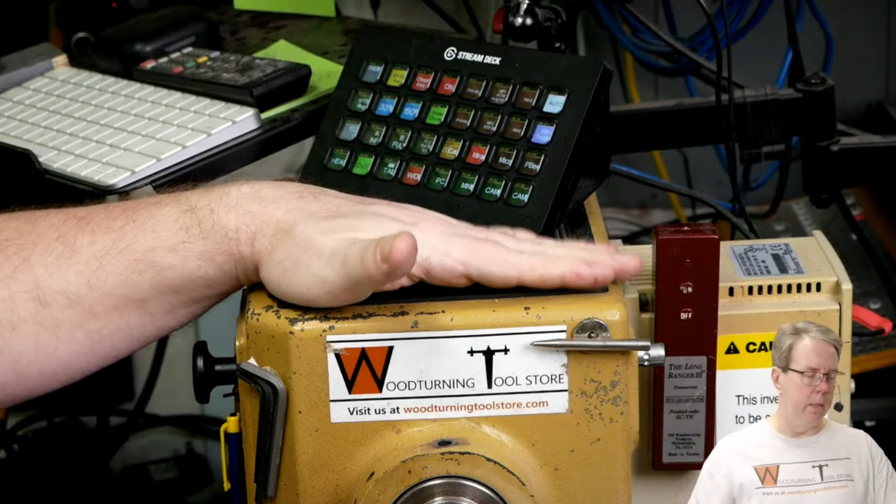My Stream Deck just sits on top of this guy. I drilled a 1/4-inch hole in the back, tapped it, and mounted this little camera mount on there. So I tend to pile up my cutters and Allen wrenches I'm currently using. Maybe I'll pull a chuck over, lay it up there to size it with calipers and get it ready to put on. So I do use this top quite a bit, and that's something else I'm going to miss. I may be building something that turns that round top into - I know there's a bit of a flat behind it, but I want to use the whole space. Of course, that little indexing cover might be in the way. We'll have to work around it and see how it works. So yeah, things you gotta think about and miss.

This has really been a ramble session, I apologize. Really no turning today, but we have one other thing to talk about.